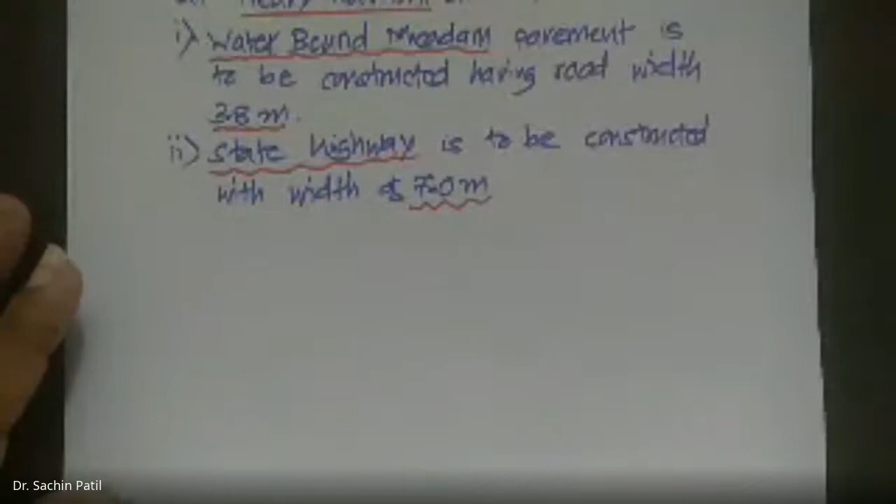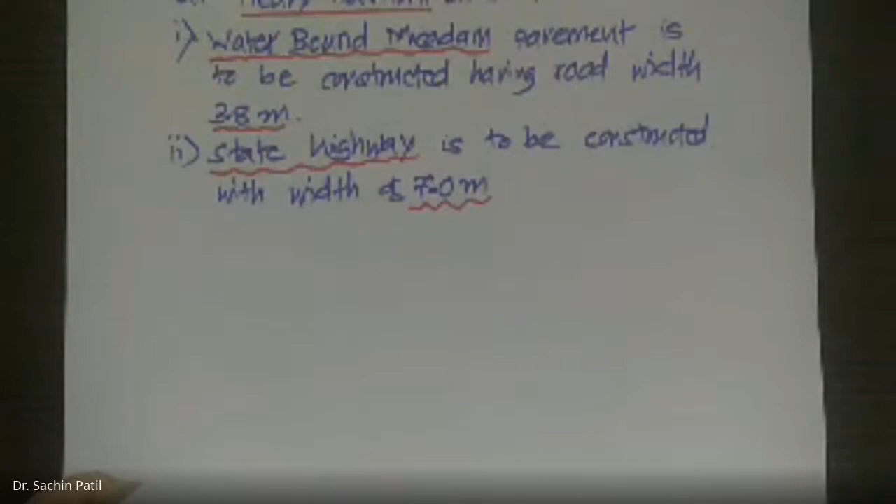Let me play the slide. Now I'm presenting and my screen is visible to you right now.

So today we'll be continuing with design of camber. Last time we started with highway parameters, road width parameter, meaning of road width, right of way, side slope. Then we went through required terrain classification, how terrain will be classified, that is slopes given to the ground. Then how highways will be classified: national highway, state highway, other district road, major district road and village road, along with urban roads. These are the different classes of roads.

Today we'll be starting with the numerical part of this transportation engineering. Mainly I will call this as highway engineering. If we have attended the first lecture on job opportunities in transportation engineering, we will come to know that major part of the infrastructure development will be railway and highways, so most of the money will be running towards that direction.

Within that, one part of highway is the pavement, road surface, which will be having a cross slope. That side slope perpendicular to the longitudinal direction of the road will be called as cross slope, also called as camber. We'll be covering design of camber in today's lecture.

When we are talking about camber, that is the inclined surface of road pavement, so that water will move from center towards both the sides. That slope is called cross slope. Remember this term: this slope given to the road pavement in a transverse direction is called cross slope, in shorter word it is also called camber.

Now, depending on the shape of camber, it is classified into different categories. When these both cross slopes are meeting towards the center, there will be a conical point created at the center of road. Most of the time, when the surface is casted on level ground, this crown will be exactly at the center, so this topmost point of road pavement will be called as crown.

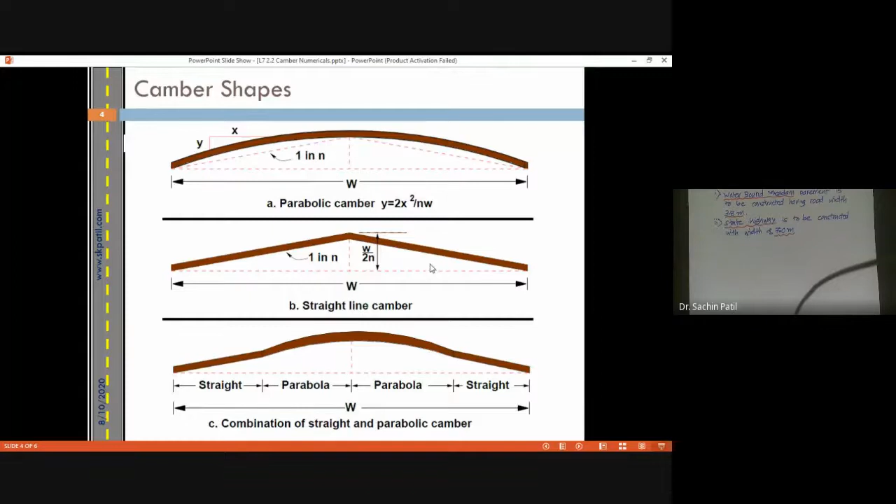Now both these surfaces are making abrupt changes. So one unified formula is calculated, which is a combination of these two cambers: a straight line where on the edge there is a uniform surface, a straight line road cross section is provided, then at center, when gradual change in curvature is going to occur, a parabolic shape is constructed, and again continued by straight line on both sides. So this is a combination of straight line and parabolic camber.

So what is important from this point of view? Camber is classified into three categories by cross section: straight line camber, parabolic camber, and combination of both these two. We'll solve an example, we'll probably be able to know.

Now, important thing: if you have got a notebook, you need to write down this question so that you can refer to it while we are going to solve the example. It will be very easy for you. Either you can take a photograph and refer to it, which will be cumbersome, or you can note down the question. I'm going to reiterate, I'm going to say the question for you.

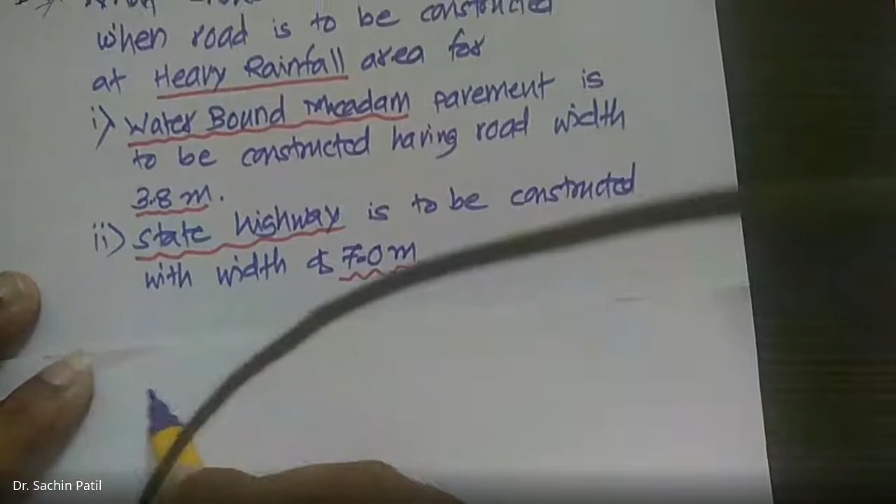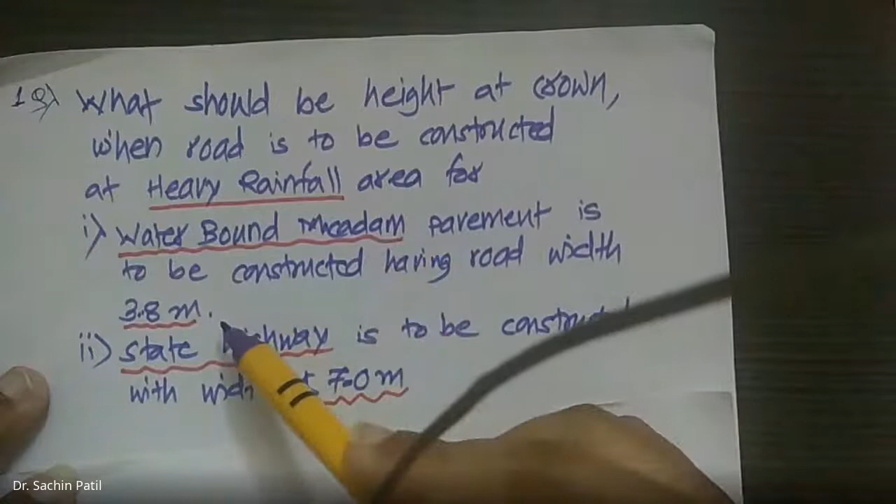This is the question: what should be the height of crown when road is to be constructed at heavy rainfall area? So input is heavy rainfall area, surface is water-bound macadam, and road width is 3.8 meters. For that case, what we know is n will be equal to 3%. Okay, n is 3%, this is the value we have taken.

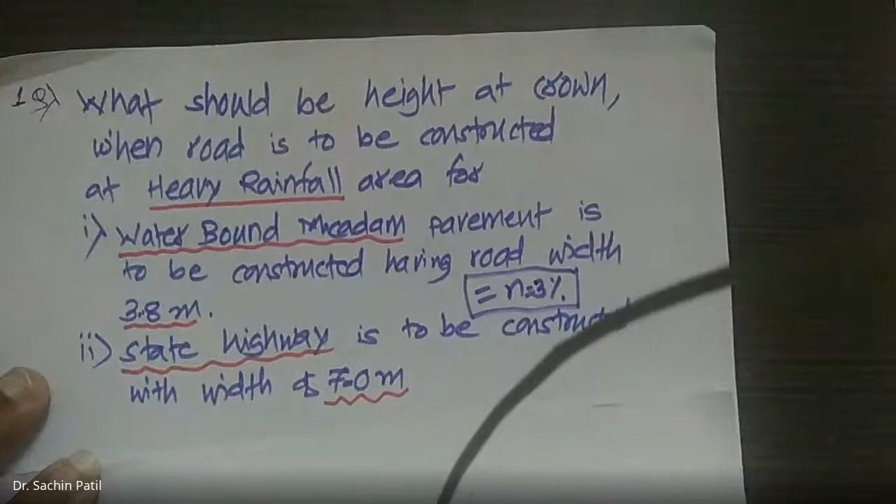Now we'll find out the rest of the values. What is the height of crown? I will be doing the derivation of a camber surface. Now the case is height of crown, that means we have to use a triangular pavement. So this will be a triangular pavement which will be constructed on the road surface. This is a triangle.

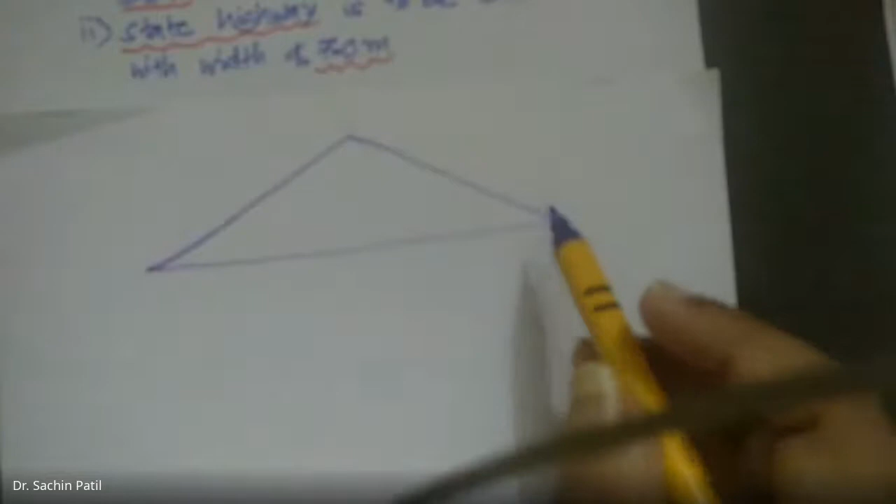It is going to happen that way. Camera is going to fluctuate because of the wire. Now this is a triangular surface. We know that height of crown, this is the crown, the topmost point, this will be crown, and the topmost point will be y, whereas x dimension will be width of pavement, w.

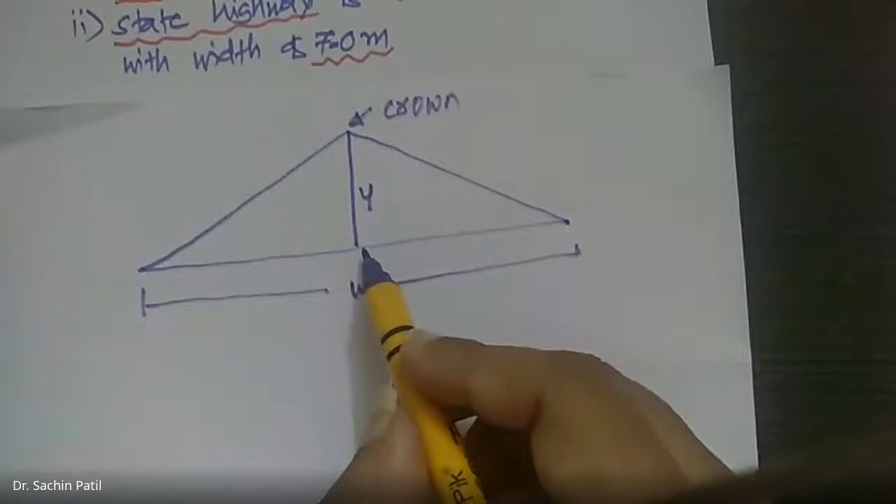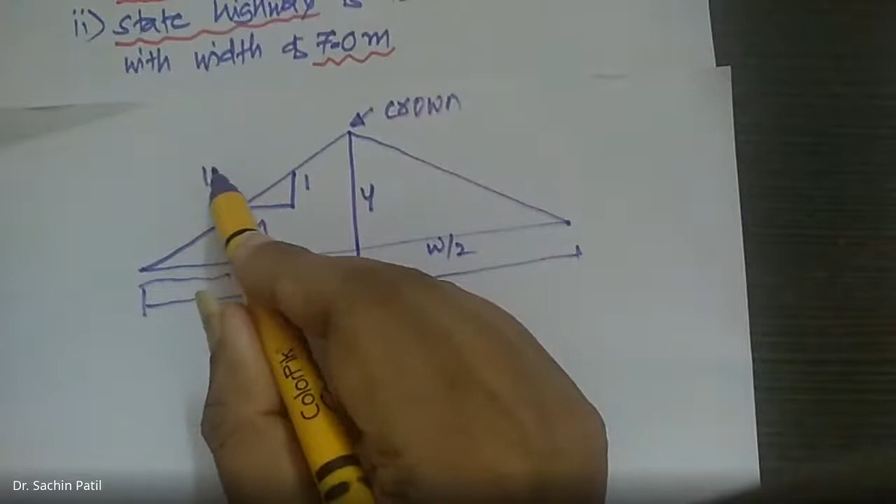Now we can divide this figure into two triangles, so everywhere the base of the triangle will be w by 2. And we know that for this triangle, the side slope, represented in the form of 1:n, will be the camber value. This camber value 1:n will be equal to 3%, and this is our design value. So we can now find out the value of y.

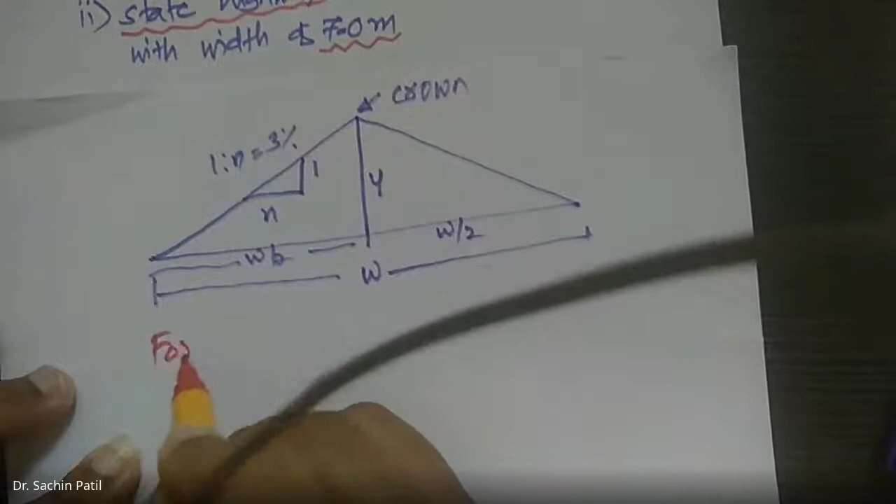What we can do is use the principle of similar triangles. So I will write down the first input: for heavy rainfall and water-bound macadam road, camber equal to 3%. Let's see how we convert 3% to 1:n.

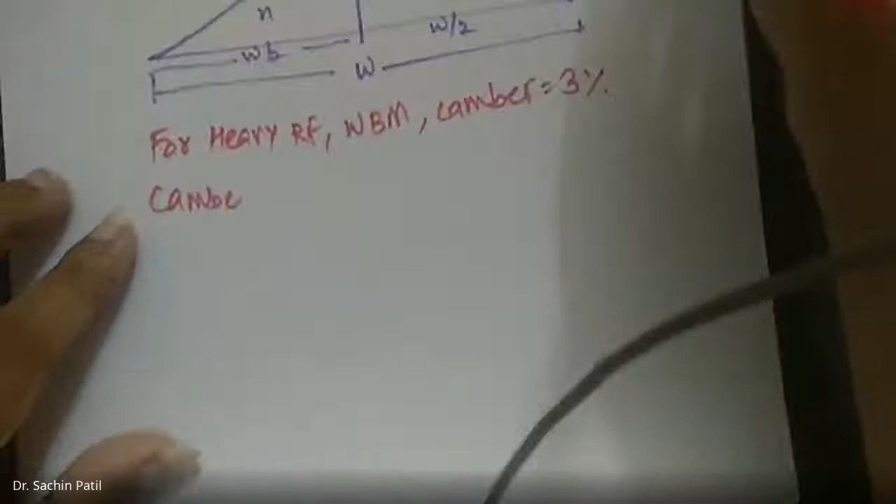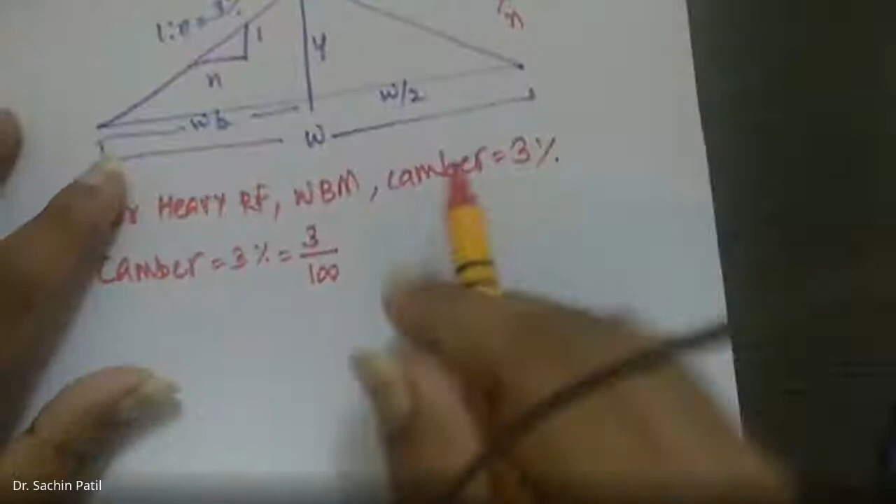So when camber is 3%, just pay attention, 3% is nothing but 3 divided by 100. But we have to convert this value to the form of 1:n. So to get 1 on the topmost surface of this equation, I'm going to write this whole equation as 1 by 100 divided by 3, so this becomes 1 by 33.3333.

So by looking at this, what we have got is n is equal to 33 for heavy rainfall. So in the previous table, we have to remember either 1:33 or 3%, we have calculated this value 1:n.

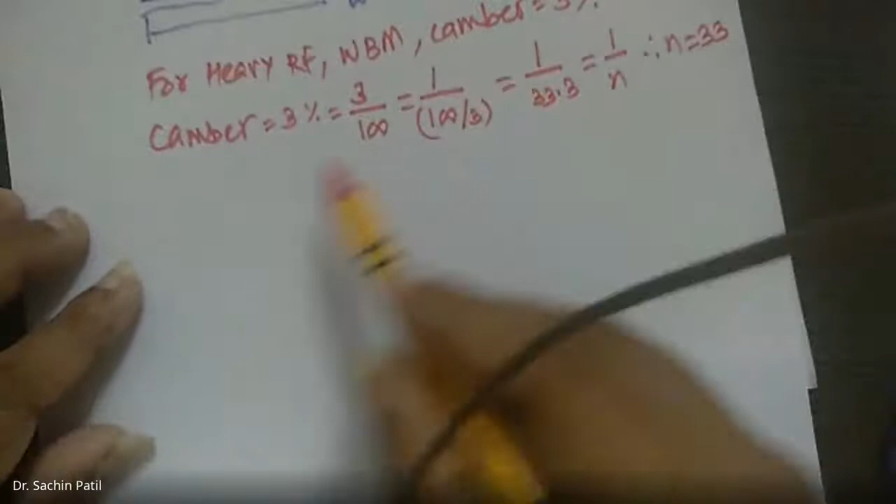Okay, then from this diagram, we can use the principle of similar triangles. We can check this central triangle where height of triangle is y and base of triangle is w by 2. Height of triangle is y and base of triangle is w by 2. So what I will write down is...

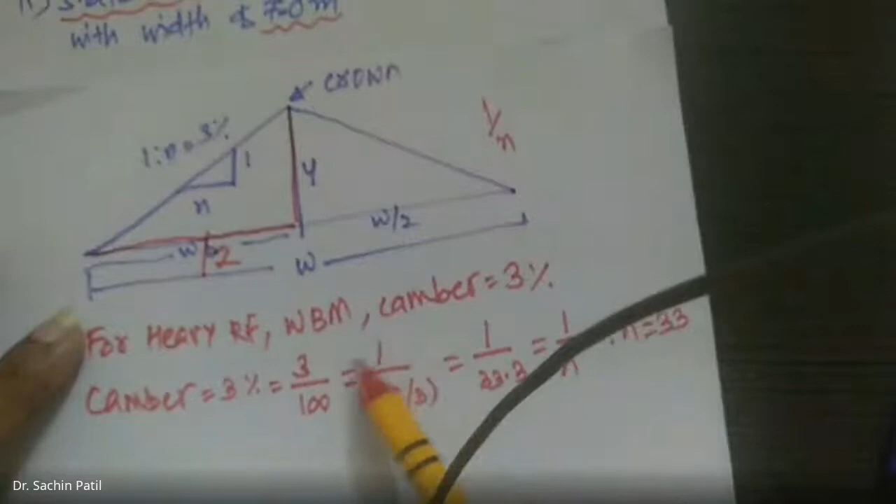By principle of similar triangles: height of the bigger triangle y by base of the bigger triangle w by 2 should be equal to height of the smaller triangle. Here the smaller triangle is 1 by n, height of triangle is 1 and base of triangle is n. Therefore, we need to find out height of crown, which is y.

This whole equation will be converted to find y. Y is equal to w by 2, divided by n. Therefore, this becomes y is equal to w by 2n. Okay, therefore we have got an equation: y is equal to w by 2n.

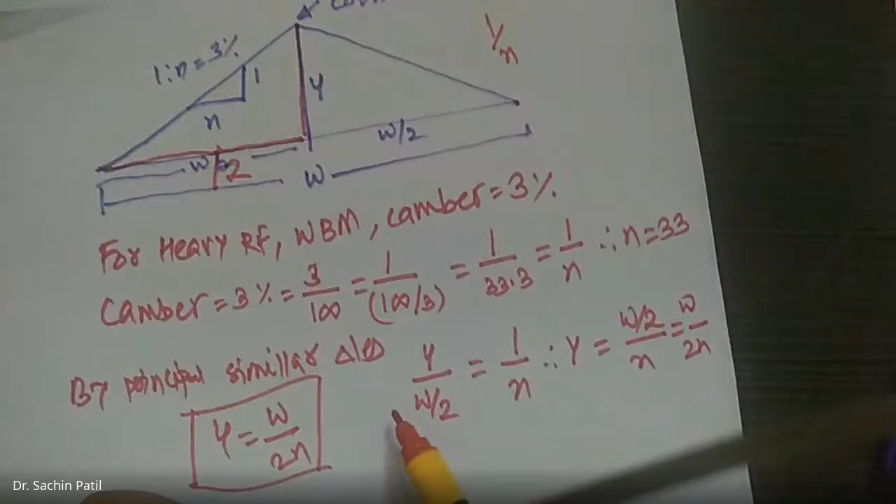This is our main finding, height of crown. Now, for the first category of data, let us put the values. Height of crown for...

WBM road, y will be equal to width of pavement, 3.8 meter given. W is equal to 3.8 meter, divided by 2 into n. N is 33. So this value comes out to be 3.8 divided by 2 divided by 33, which comes out to be 0.058 meter, so in terms of millimeters, it will be 58 millimeters height of crown at the center.

For category number 2 road, y is equal to w by 2n is the formula. Width of road for state highway is given as 7.0 meter. 2 into n is 33, which comes out to be... tell me... oh sorry.

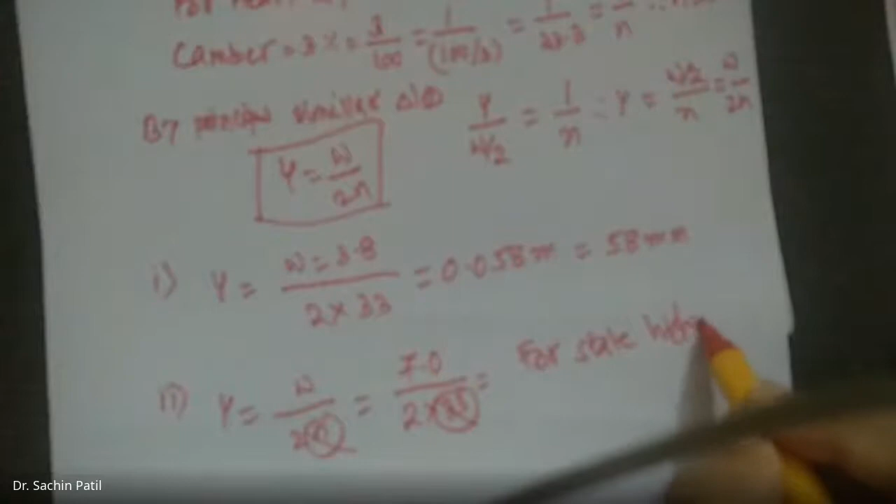We need to find out this value of n. If we check out the table, for state highways, heavy rainfall area, camber slope was, anybody who can remember the table, those who wrote it down, camber slope was 2%.

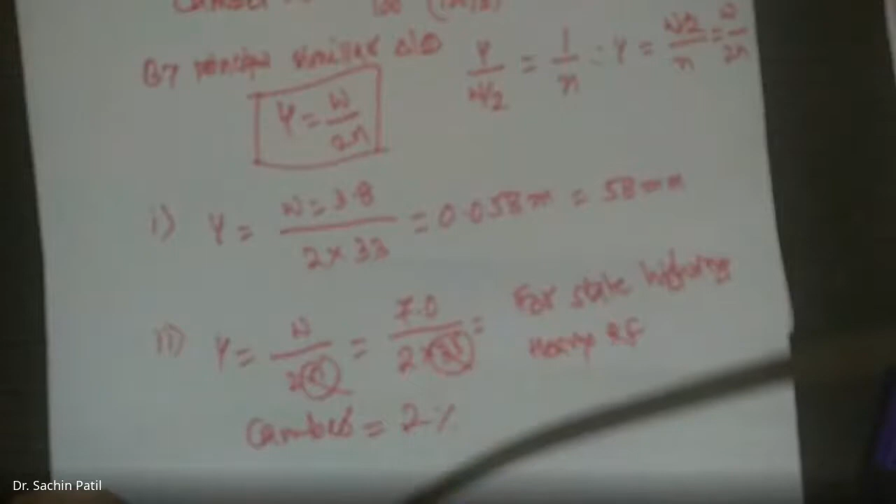So 2% is nothing but 2 by 100. We have to convert this value to 1 by n something. So it will be 1 divided by 100 divided by again 2, which will be 1:50. Therefore it is 1 by n, N is equal to 50.

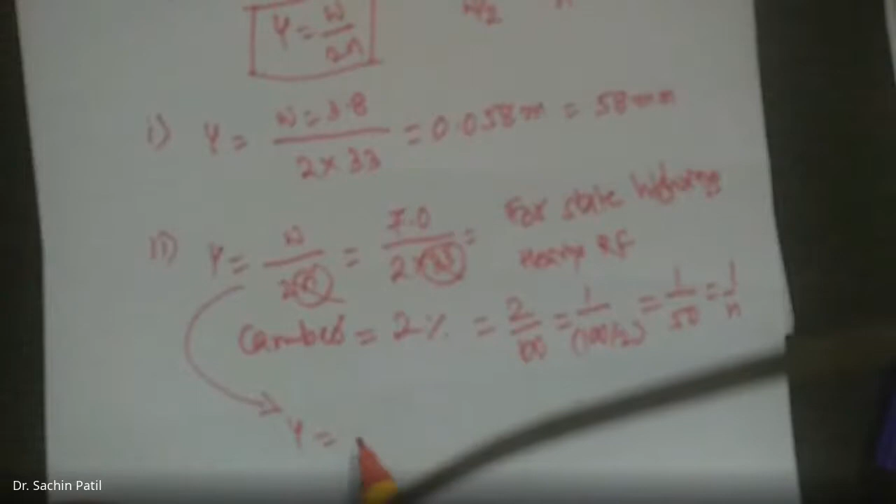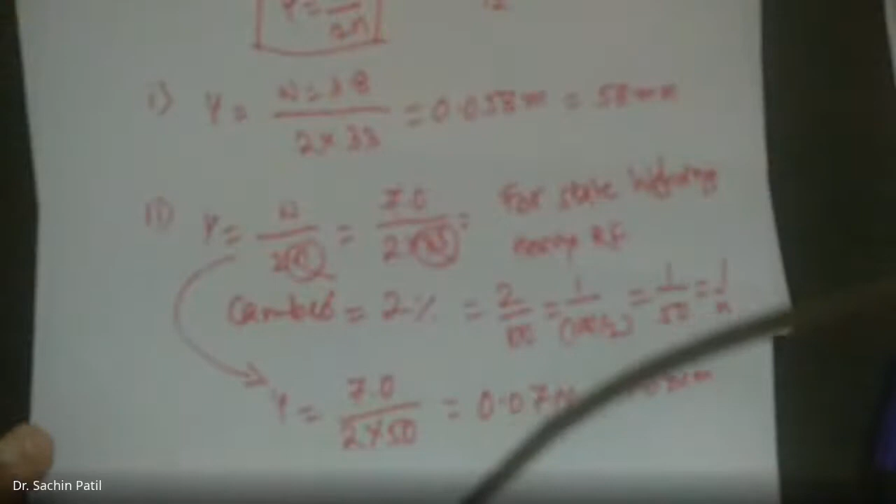Now for this above formula, height of crown, y is equal to w, 7.0 divided by 2 into 50 meter. This value comes out to be 0.07 meter, which is 70 millimeter. So this way we'll be able to find out height of crown for this triangular pavement, for linear pavement.

Now I'll be going for one more example of this category. You can check out this statement. I'll be showing this question on screen. Just a moment.

So this was the value for state highway, and state highway will have heavy rainfall. Concrete pavement will be there with 2%, the value we took earlier. Then let us go for one more example.

You can note down this question now. A parabolic camber for two-lane road with a thin bituminous surface is to be constructed in an area of heavy rainfall. Prepare a dimensioned sketch of camber of road.

Okay, first note down the question till then, then we can continue with solving the problem.

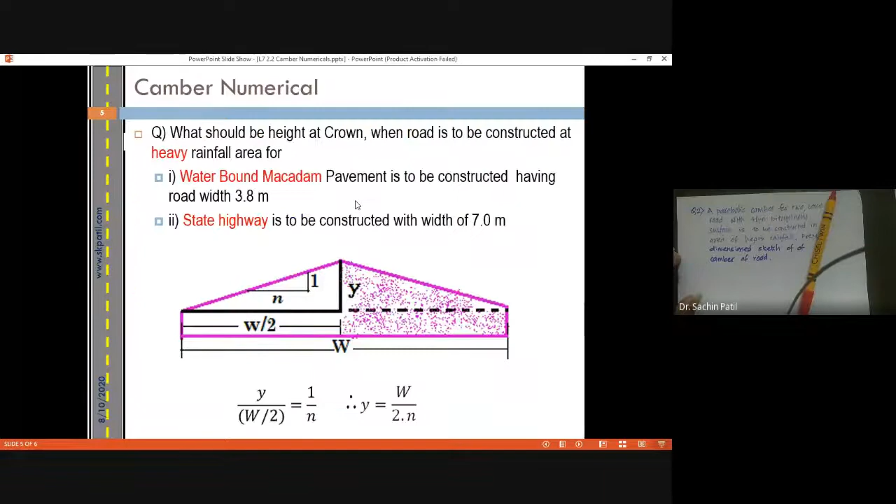Thin bituminous pavement and heavy rainfall, this value will come out to be 2.5%. Now let us solve this problem.

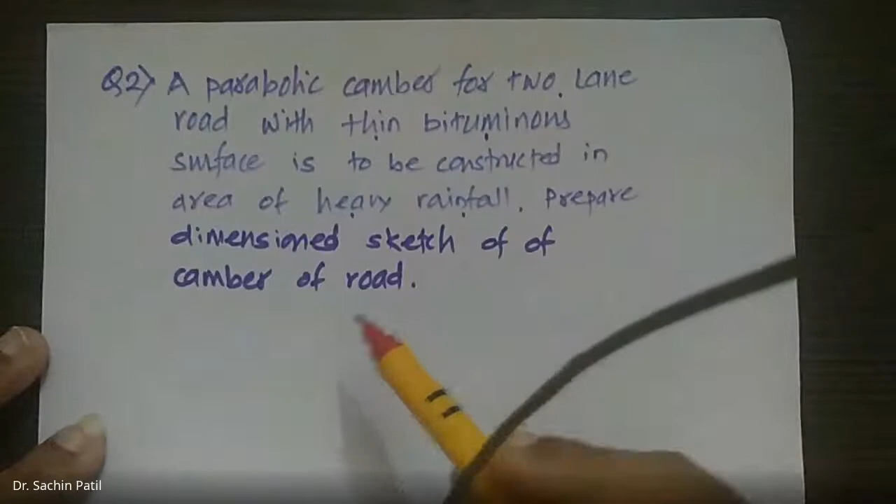So the previous question is written.

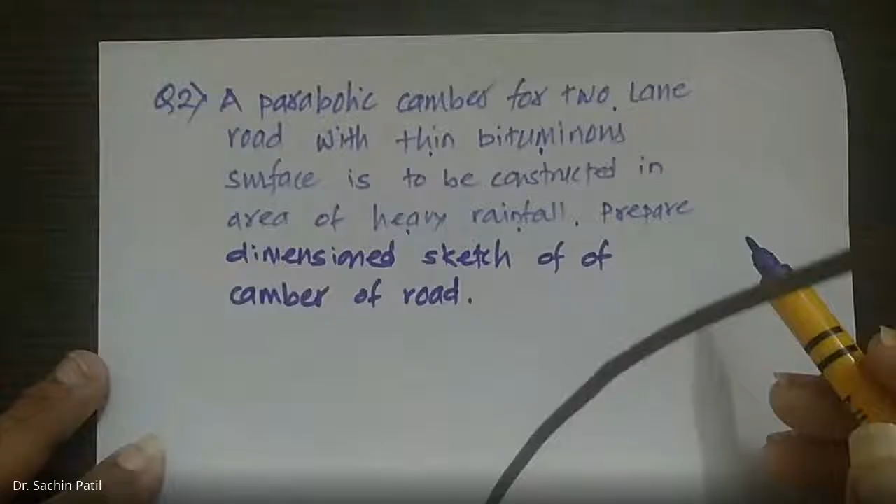Now parabolic camber, what we can do is first write down the values. Slope, cross slope was...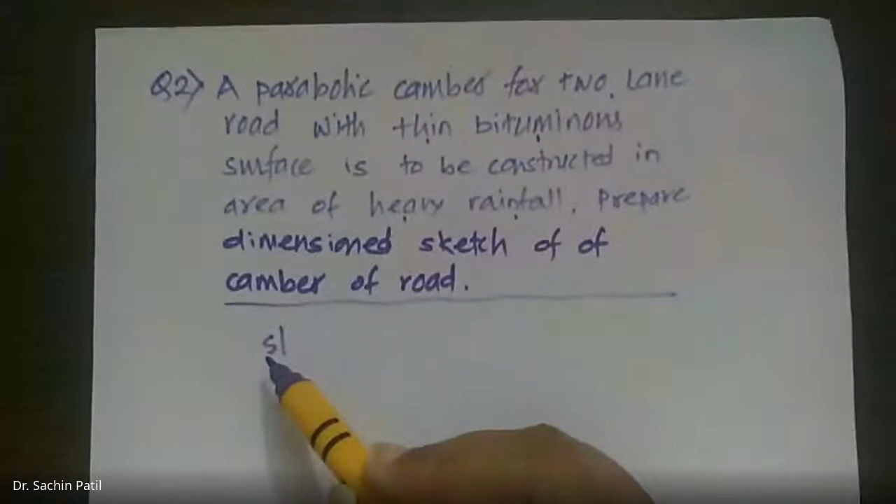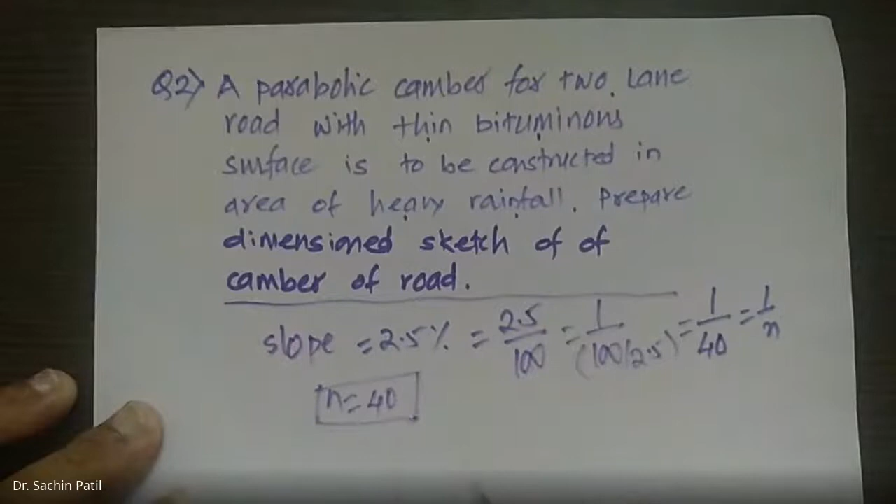First input. So by looking at this value, we can plot the camber now. What is happening? We have got n equal to 40. This will be our parabolic camber.

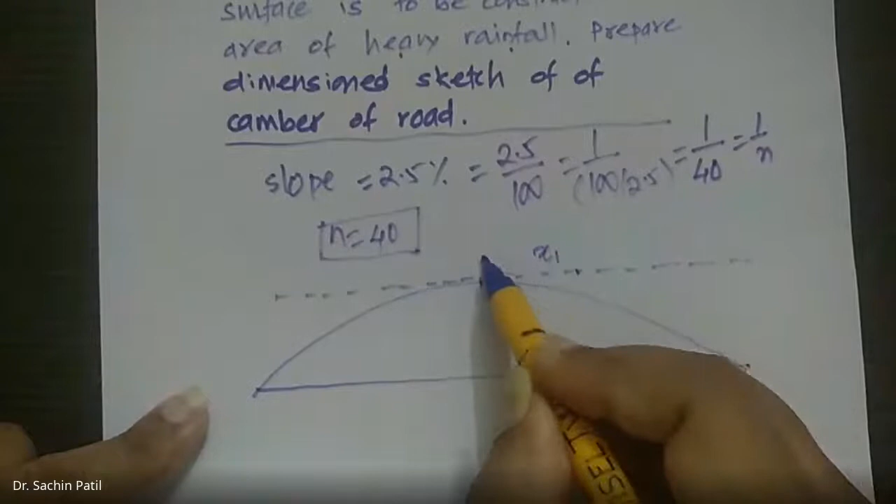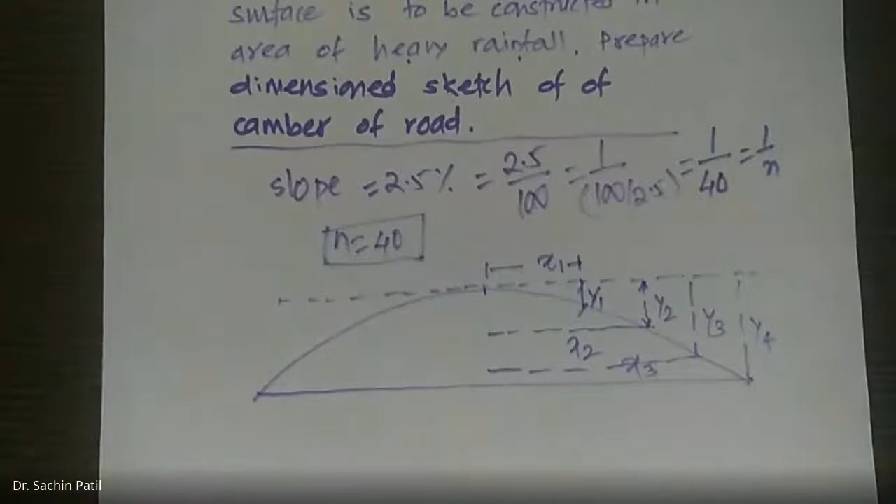We don't know yet what is the vertical height of this intercepts. Okay, so suppose this will be distance x1 from center direction x1. This vertical intercept will be y1. In similar way, I'm going to plot here. This will be x2. This vertical intercept from top will be y2, measured from top, remember. Similarly, somewhere here x3, it will be measured from top y3, and end of pavement y4, whatever. Now, corresponding distances are x1, x2, x3, and w by 2 at the end. Here, width of pavement w by 2, which is half of width of pavement.

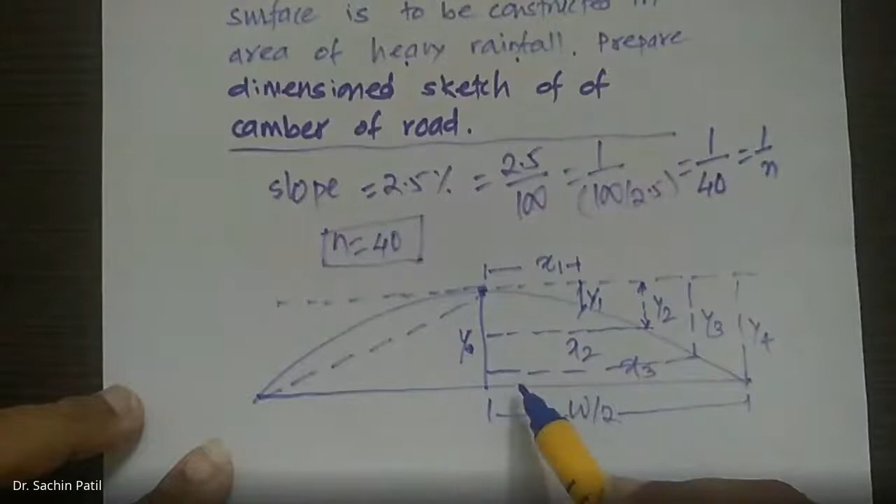Now, for the same pavement, this will be topmost point, which is called the crown, and we can connect this crown by straight line. This is nothing but y, which is the height of crown as per triangular pavement, triangular camber. So we can utilize straight away the formula for triangular or straight line camber: height of crown. Height of crown y is equal to w by 2n.

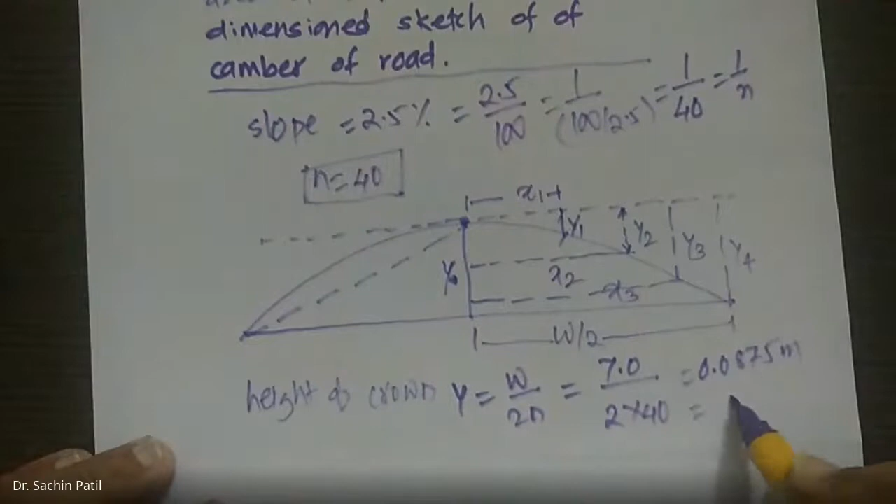Pavement width is 7 meters, that we have assumed, 2 lanes at minimum. 2 into 40, that y will be equal to 0.0875 meters, that is 87.5 mm.

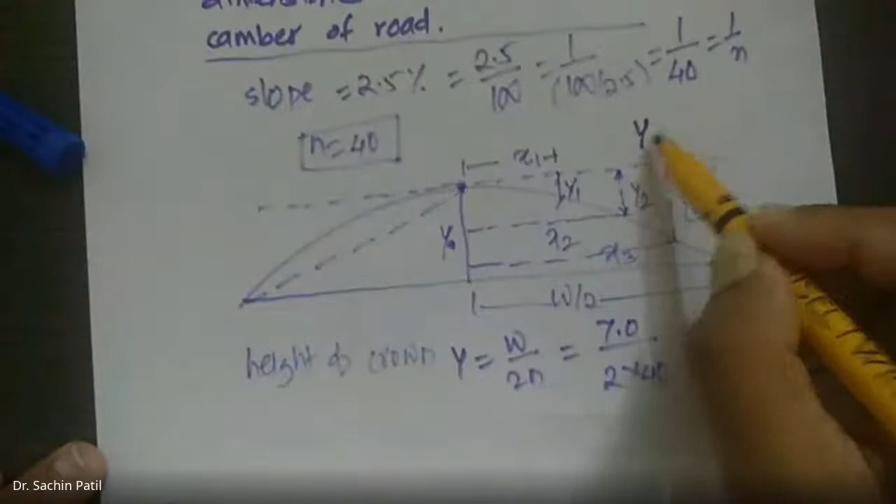Now, why have I taken this value? Just now we have seen that for parabola, these y1, y2, y3 intercepts are given by equation y is equal to 2x square by nw. This is one more equation for y, and this is the equation for height of crown. What is the difference between these two?

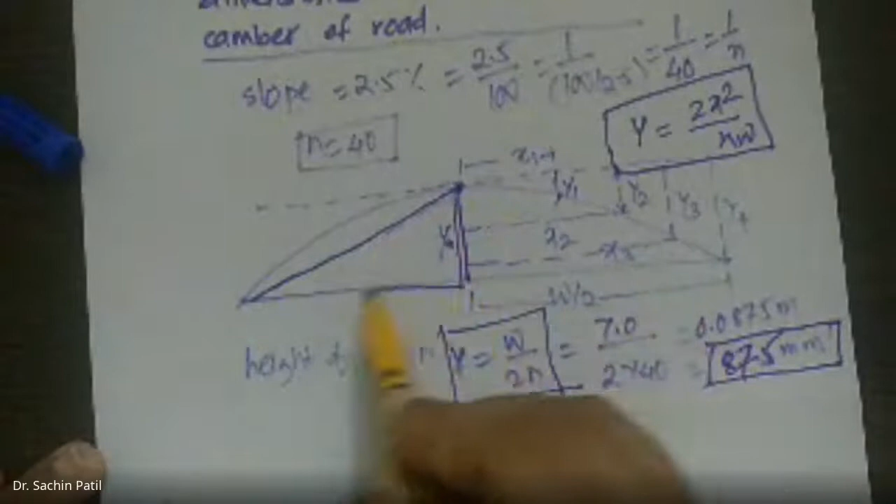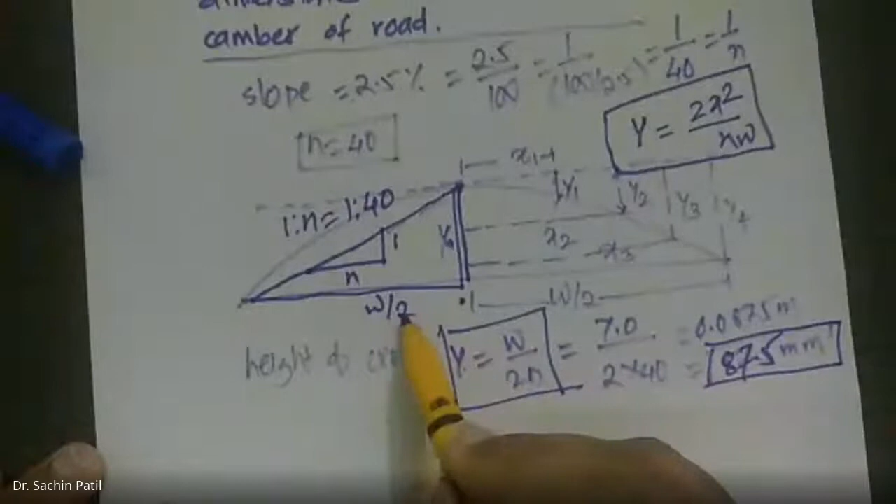Just understand. Y is equal to w by 2n, that is the height of a triangle. For this triangle, y is equal to w by 2n is calculated by using principle of similar triangle 1 by n, where n is equal to 40, 1 by n, which is 1:40. We just have calculated for this pavement. By using this, what we know is W by 2 is 3.5 meters for this pavement. Total width is 7 meters. Therefore, W by 2 is 3.5 meters. We calculated height of crown from bottom.

But looking at this parabola equation, y is equal to 2x square by nw, I will put the value of x equal to 0. X equal to 0. From crown, x is measured in horizontal direction. So here, x equal to 0, y will be equal to 0. Therefore, we will get y0 equal to 0. This is the height of pavement from top line.

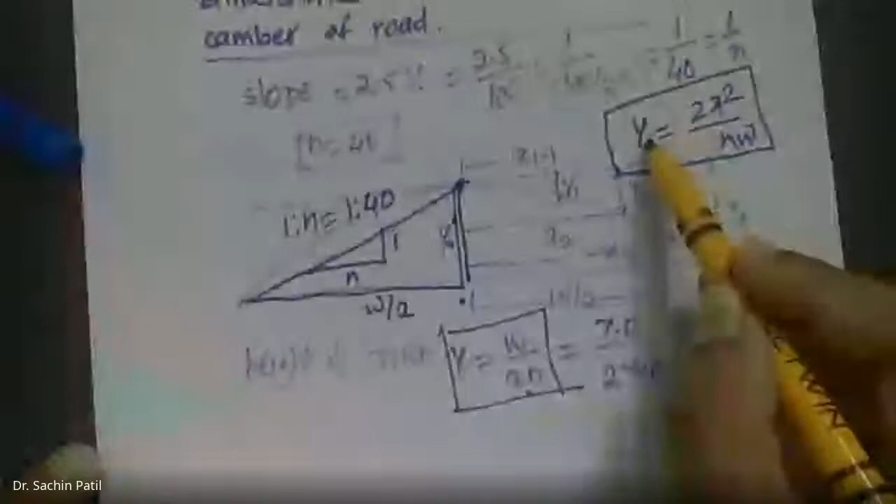We'll use x equal to 1. Therefore, y will be some value, which is some numerical value measured from top direction. That means these are two different formulas. We are using this y is equal to w by 2n to measure the height of crown, whereas we are using this parabola equation to find out vertical intercept y1, y2, y3 and y4. Remember?

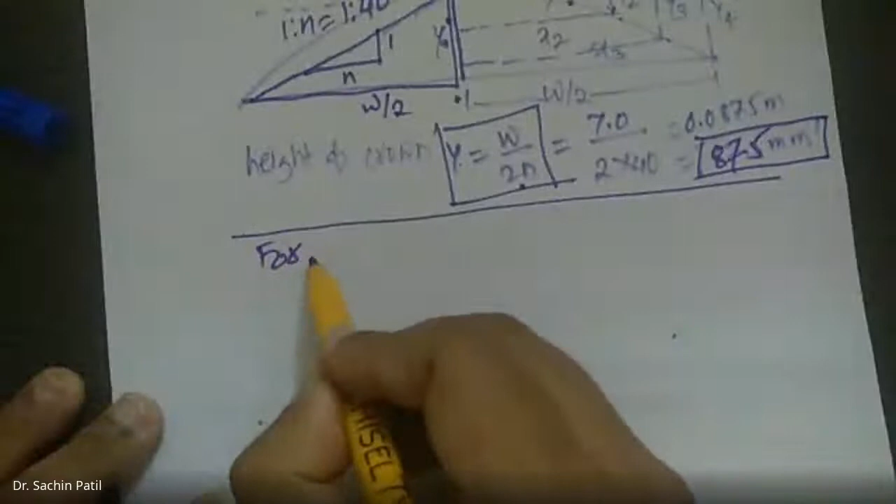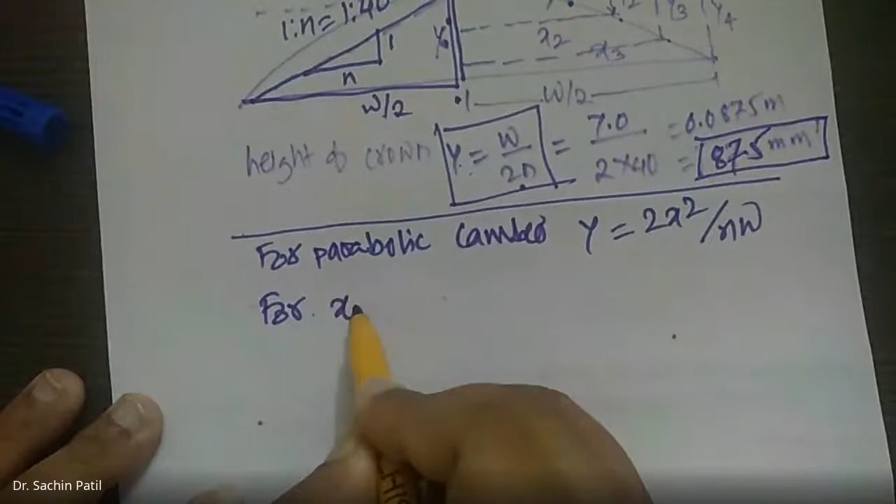Now, we have got the height of parabola. We will write down the equation now for parabola, for parabolic camber. Y is equal to, the equation we know, 2x square by nw. Therefore, for x1 equal to 1 meter. In this diagram, x1 from center towards right at a distance of 1 meter, x1 equal to 1 meter, y1 will be equal to 2 into 1 square divided by n is 40 into width of pavement, w is 7 meter, which is 7.1 mm.

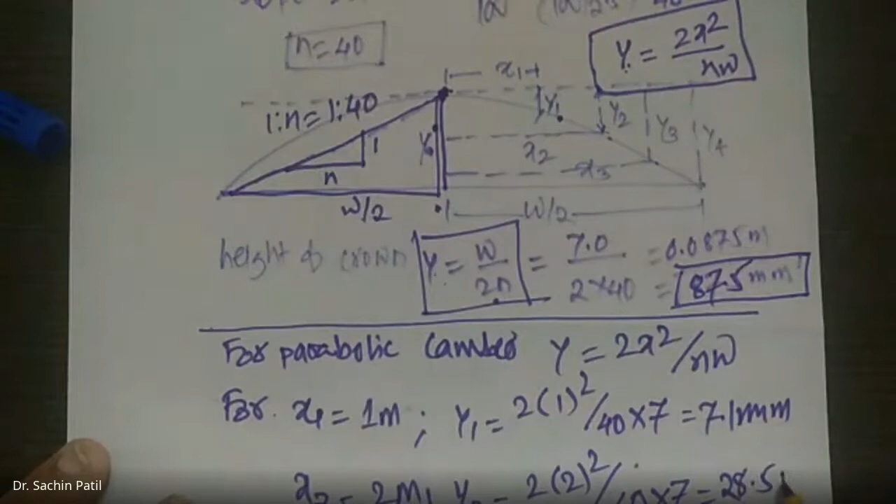y1. x2 equal to 2 meters. Therefore, y2 will be equal to 2 into 2 square divided by 40 into 7. So that value will come out to be 28.5 mm. Similarly, x3, let us take 3 meters, because width of pavement is 3.5 meters only. So x3 equal to 3 meters. This y3 will be 2 into 3 square divided by 40 into 7. That value will be 64.3.

Similarly, y4 at end will come at this place, y4 at end will be 87.5. This way, we have got the values. Now what we can do is, on a plain paper, we will make a geometric diagram with the scale. X equal to say 1 meter, so that will be 3 centimeters. Some scale will be there, 3 plus 3 plus 3 and 1.5, that will be last remaining, something like that. So we will be able to fit this whole diagram on the paper. X1 equal to some value, and with that same scale, y1 will be 7.1 mm.

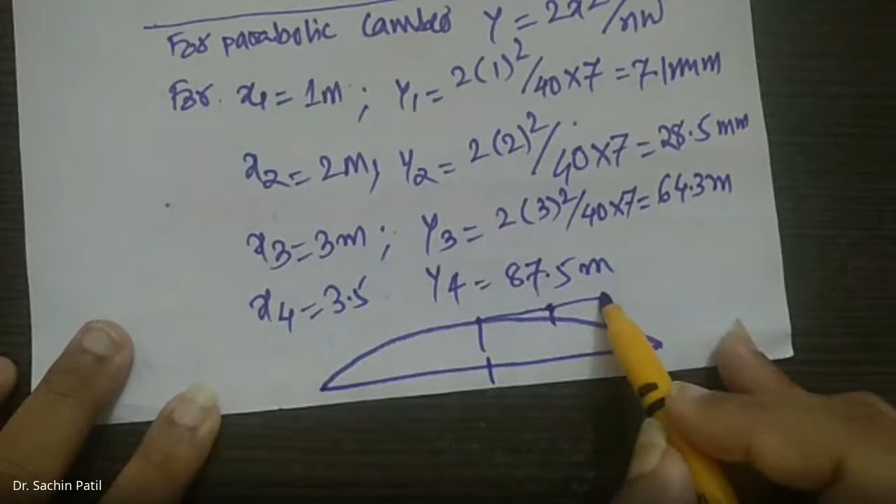So we plotted it. We'll be able to plot these x1, y1, y2, y3 and y4, and we can plot this profile. What is the use of this? Why go for this? Because when you will be working as a highway engineer, you need to tell the people working under you how you are going to verify that the road surface is exactly parabolic.

In the field, what they do is create a negative forma like this. They will be constructing some metal framework of this size. I'll be using some color now.

So this is a red color framework, which will be cast of say metal or wood, and you can think of it as a blank surface like a bridge, which is moved along the road surface, and you can check if there is a gap between the road and this forma, then that error needs to be corrected. This way, a civil engineer will be able to give direction to the people working under him about what should be the final surface of the pavement.

So for that you need these values of y1, y2, y3 and y4. These are the dimensions given to the person, say a machinist who will be doing the welding, or a carpenter, to make a frame of wood or metal which will be used to verify the camber surface on the road. Okay, I think it will be clear to you now.

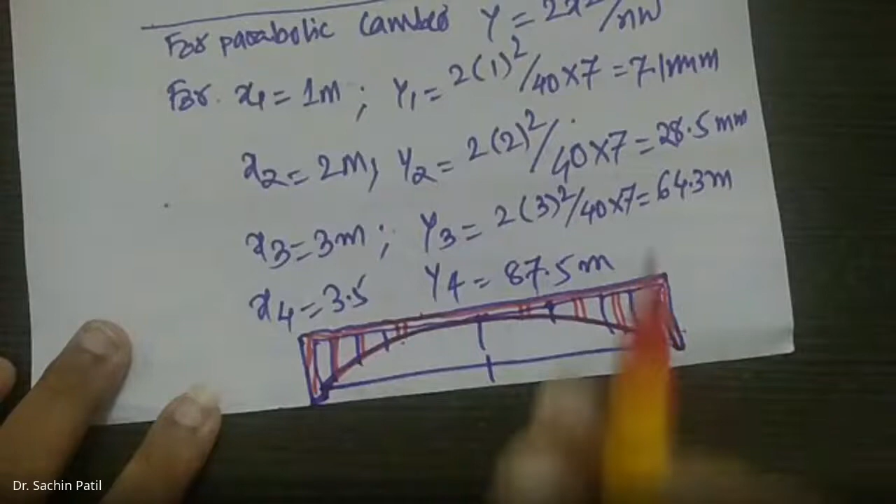I will be going with one more example. I will be going with highway alignment, highway design parameters, starting from the coming lecture, next lecture onwards. There are some important derivations that need to be covered.